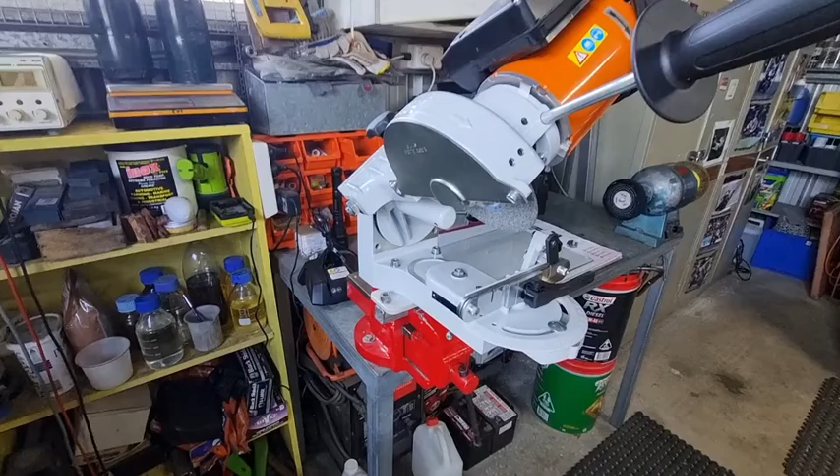Somebody was asking me if I could talk about the USG angles and cutting angles, and explain those on RS chain and RM chain. RS chain is your full chisel, and RM is your semi chisel.

I'll just put this up on screen now. This is an old box you're watching at the moment, about 12 years old. I'll leave it on screen and you can do a screenshot or have a look at the different types of chains there.

So there's still all alphabet letters. There's also PMX, which is ripping chain. RSK, which is Rapid Super Classic, spelt with a K, not a C. PMN, Picco Mini. There's also Pico Mini Micro - I think it's Pico Micro Mini. Yeah, whichever way it is, that's what it is anyway.

RMX, which is ripping chain. RCX is a different type of ripping chain - maybe the difference is full skip or semi-skip. You've got RMH, Rapid Micro Harvester, used for harvesters. You've got Rapid Micro Harvester Special, so whatever that one is, that's something different.

PD and PD3 stands for Picco Duro Tungsten Carbide, so there's a difference between PD and PD3, not too sure on that. RH is for Rapid Hexa. RS, Rapid Super Full Chisel. RM, Rapid Micro Semi Chisel. There's also an RSC for Comfort. So yeah, there's actually quite a few.

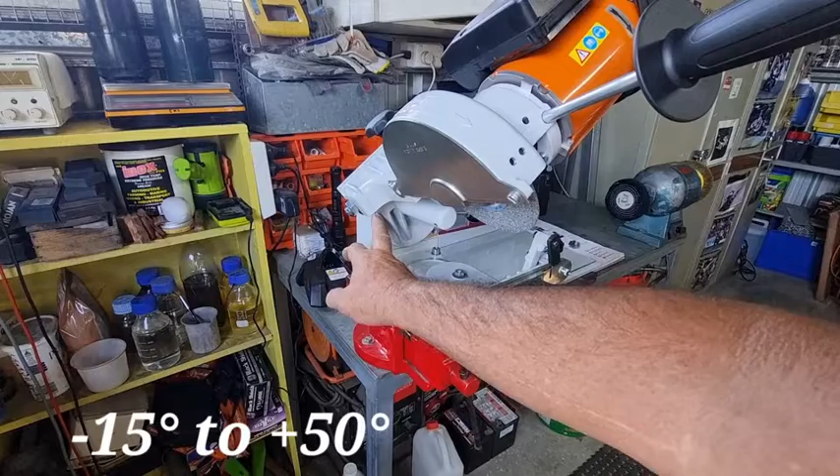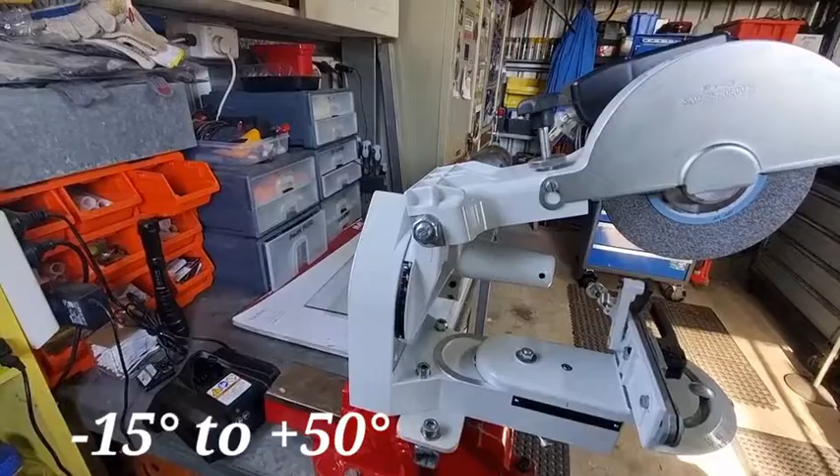This is all your degrees from minus 15 degrees right all the way up to 50. It's just a matter of moving this lever and you can rotate like that and see the degrees. If we zoom in, you should be able to see them all there. So there's your 50 degrees, and right down the bottom is your minus 15 degrees. So you've got a fairly large scale there.

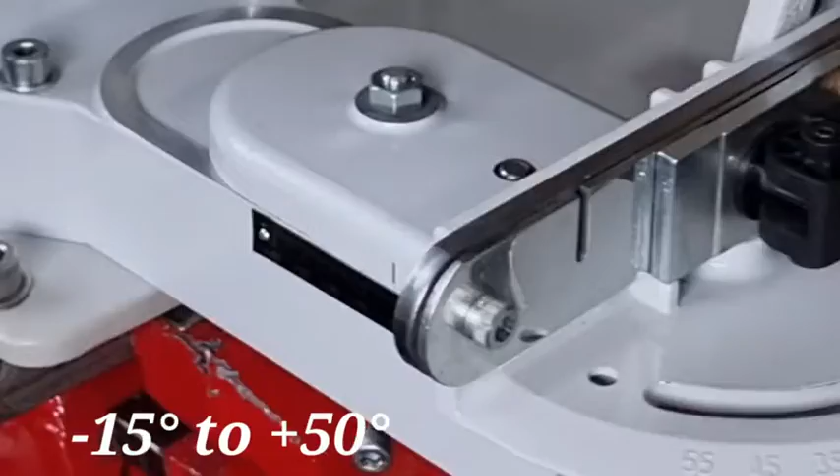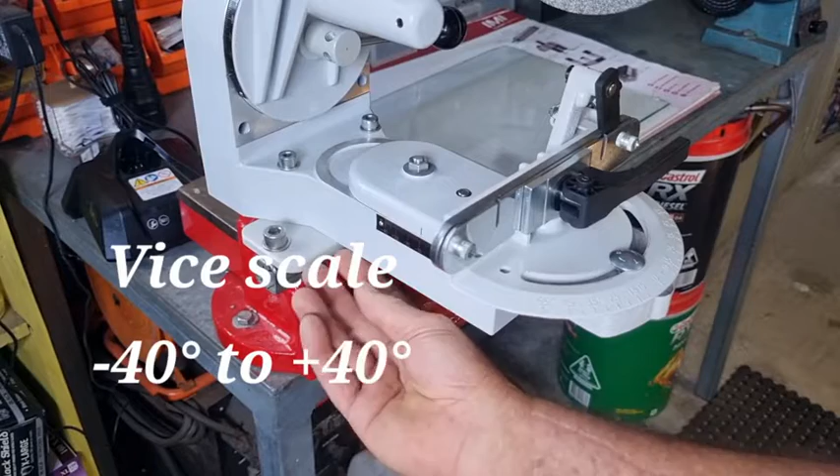The next is the movable vise. So the vise slides backwards and forwards, also used to centralize the wheel, also used for the other attachments for the hedge trimmers, and also used for the circular saw blades that can be sharpened on here as well.

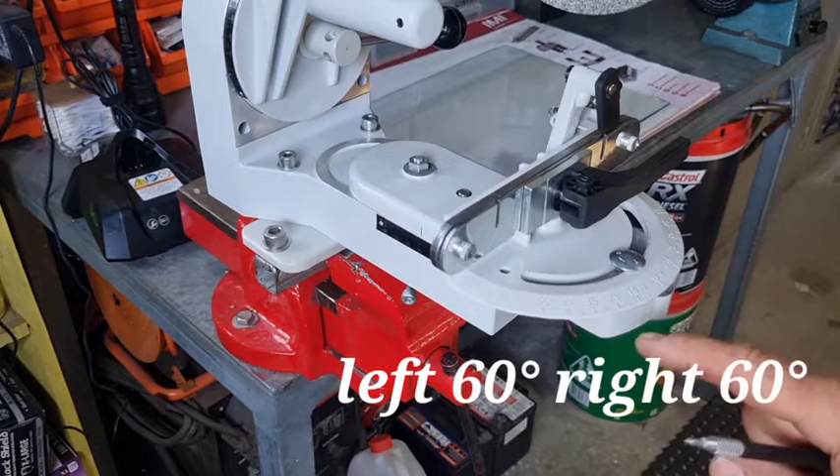The next is your C scale. This is your top plate angle, the top of the tooth. It goes up to 60 degrees left, and up to 60 degrees right. But on a chainsaw, we only ever use 35 degrees left and 35 degrees right. So it's got that functionality, a large range of functionality on it.

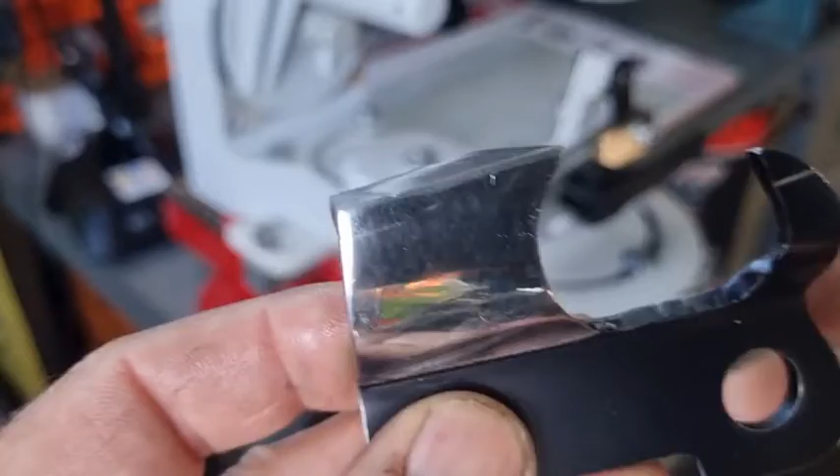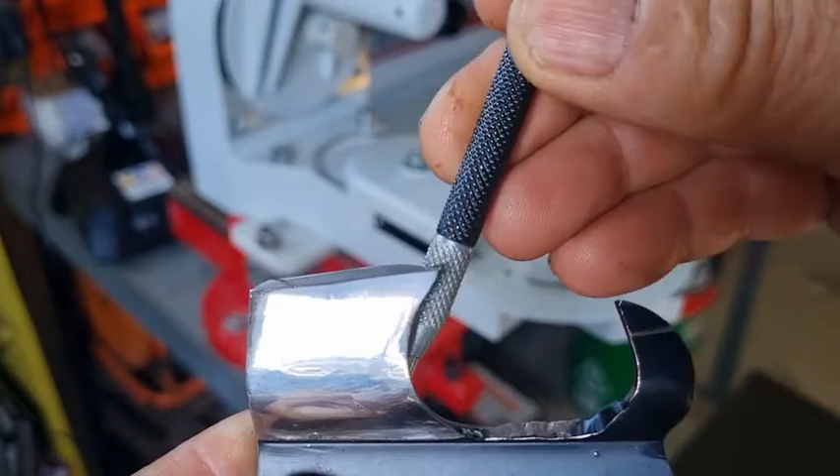So Stihl have a more aggressive top plate cutting angle. Now, for those not too familiar with top plate cutting angle, if that's a tooth, that's the top plate - when you look down, that's the top plate. But there's another beveled edge on there, and that angle is on an angle. That angle on an Oregon is 60 degrees generally, and that translates to 30 degrees on a Stihl grinder.

Stihl like to keep 40 degrees on their semi-chisel and their full chisel. Now, if you've got an Oregon grinder, 40 degrees translates to 50 degrees on an Oregon grinder. And 30 degrees on a Stihl translates to 60 degrees, and 25 degrees translates to 65 degrees.

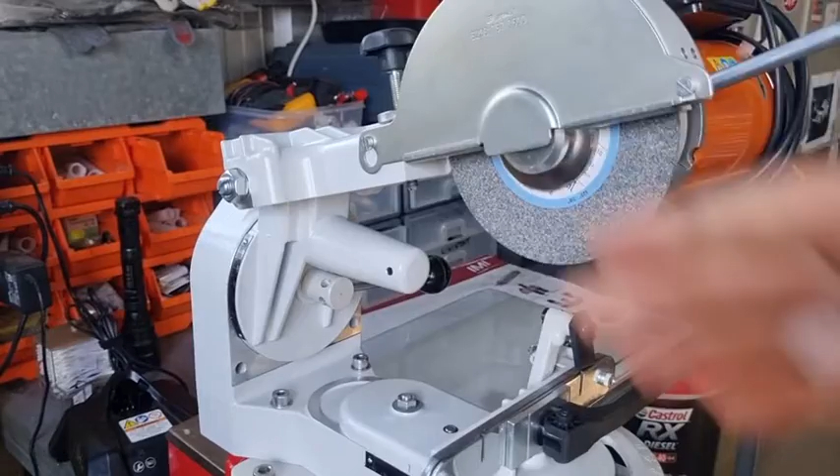So it's pretty easy to work out, because on a Stihl, when the grinder is sitting up vertical, it's on 0 degrees at the top and it tilts down that way, and at that position is 90 degrees. On an Oregon grinder, it's totally different - it starts at 90 degrees vertical and tilts the opposite way and goes to 0 on this side. So it's different, exactly the same angle, except a different reference point. That's all you have to understand - you've got a different reference point and you can work it out.

The C scale, which is this one here, is the same as the Oregon. No difference. So your semi-chisel and your full chisel, use 40 degrees on there. 40 degrees would be, we'll just tilt it to the 40 degree position. That'd be 40 degrees there. So that's 40 degrees on a Stihl USG grinder. That's what 40 degrees looks like.

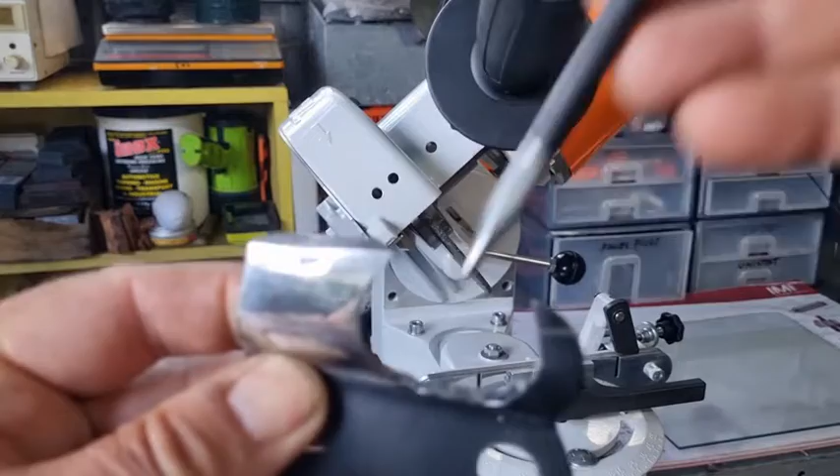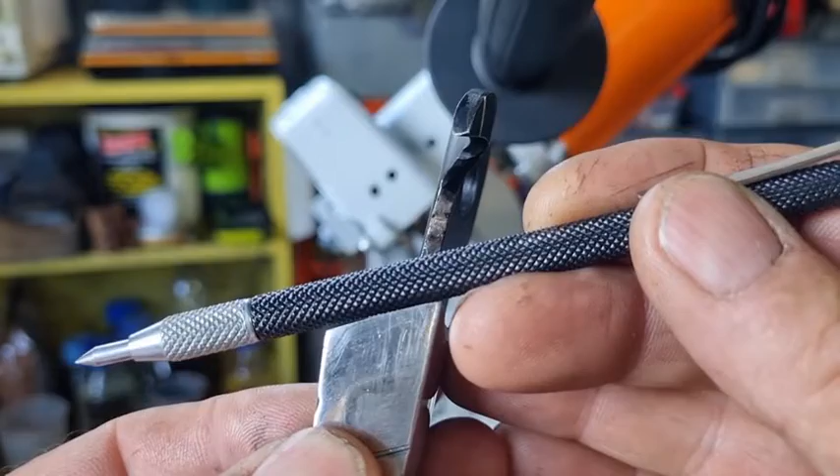50 degrees on an Oregon. Most of the time you'll read about chains being anywhere between 50 degrees and 60 degrees side plate cutting angle, I should say. Don't get it confused with the top plate angle. This angle here on full chisel is normally 25 degrees, and on semi-chisel it's 30 degrees.

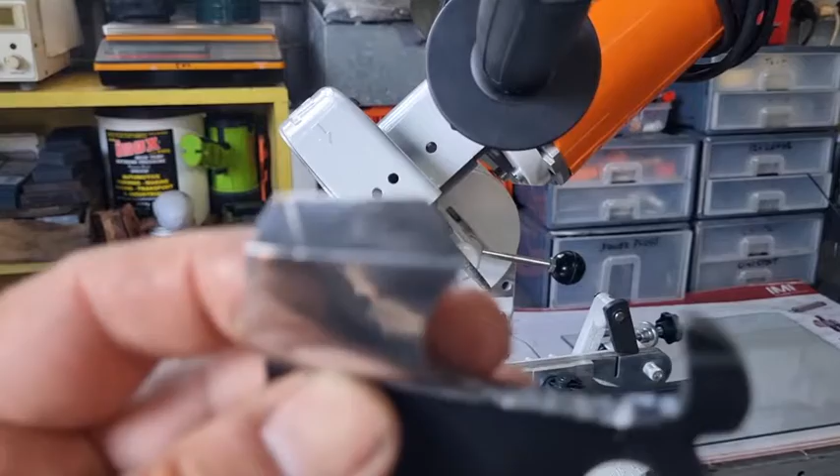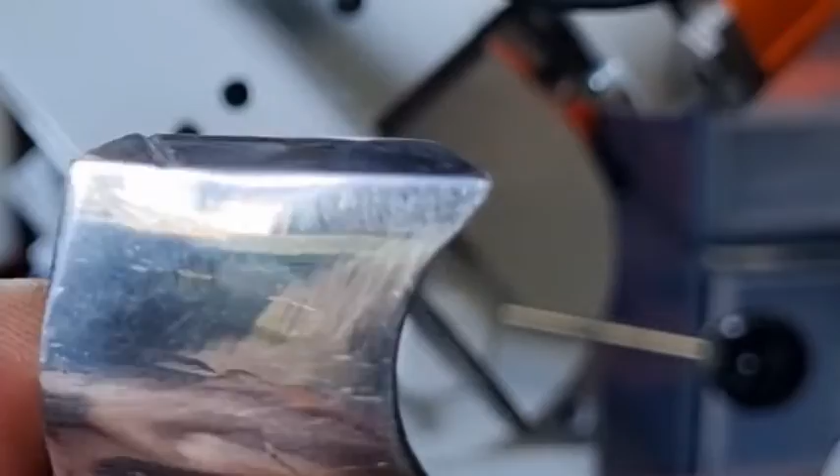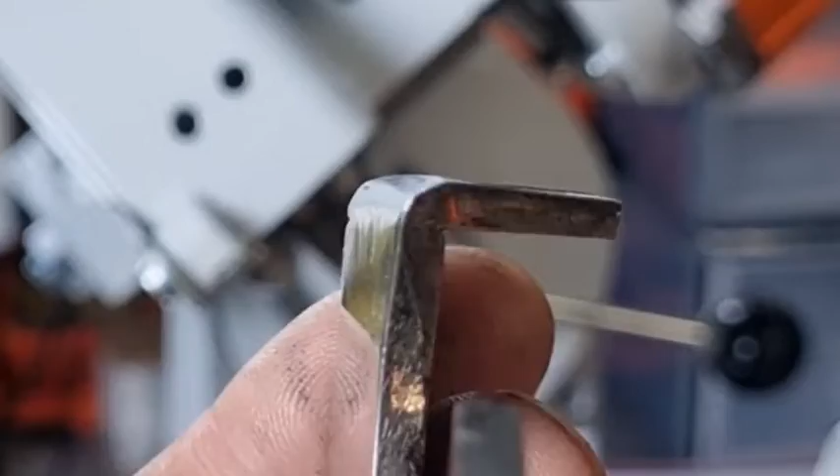Now, the difference is the full chisel is much more pointy and has a square shoulder on it, and this edge here is more prone to getting blunt much quicker. So that's the square shoulder, and you can see that. The semi-chisel has that rounded corner. You can see that. So this edge here has got a lot more room on it, so it takes a lot longer to become blunt. So that's the difference.

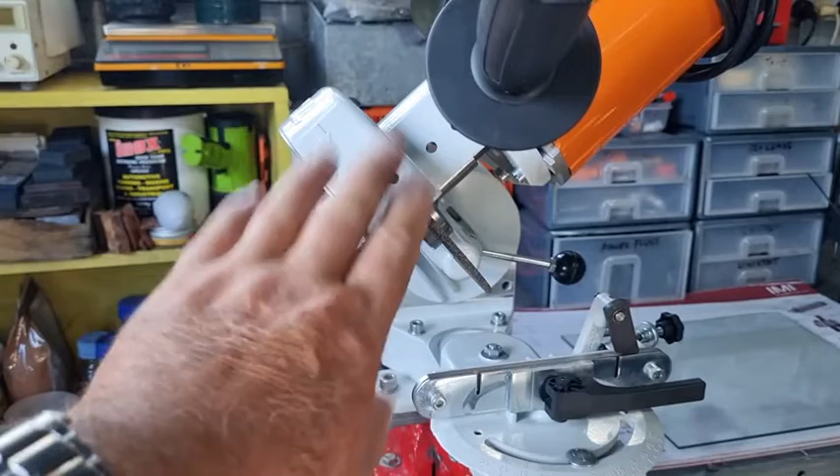Now, when you do look at all the angles that are on here, you'll find out that the A column will give you the angle of the head. All the chains, except for the milling chains and Rapid Hexa and tungsten carbide, forget those for the moment. The semi-chisel and the full chisel are all 40 degrees. Your Rapid Hexa runs 25 degrees. Your Rapid Duro on there at 10 degrees.

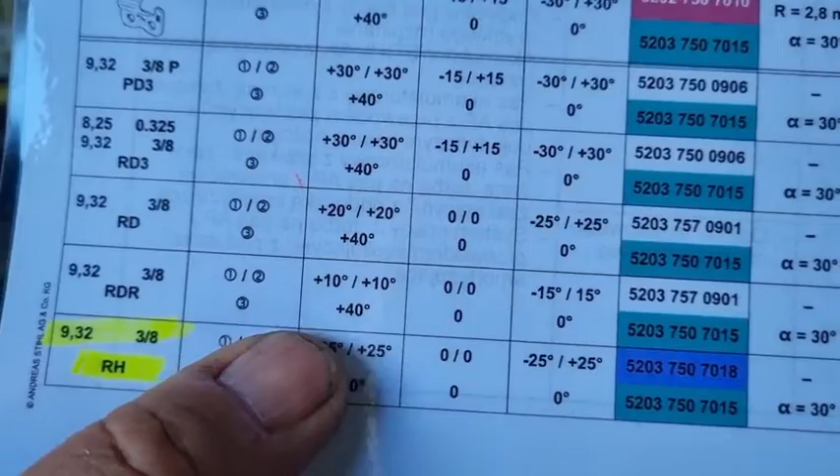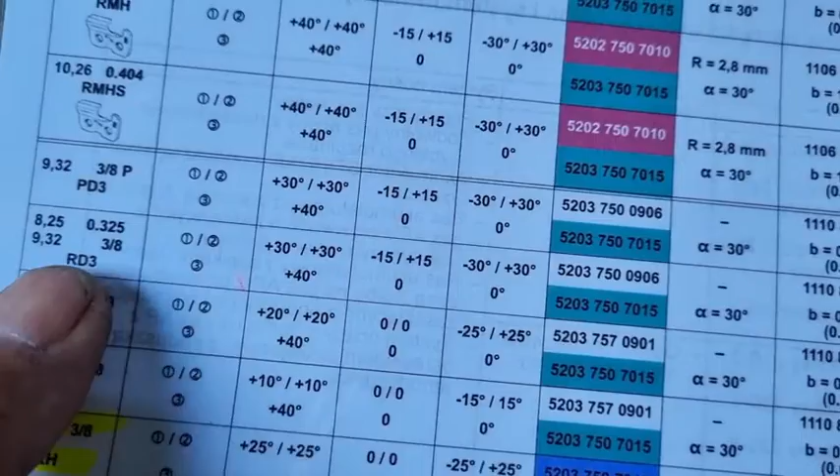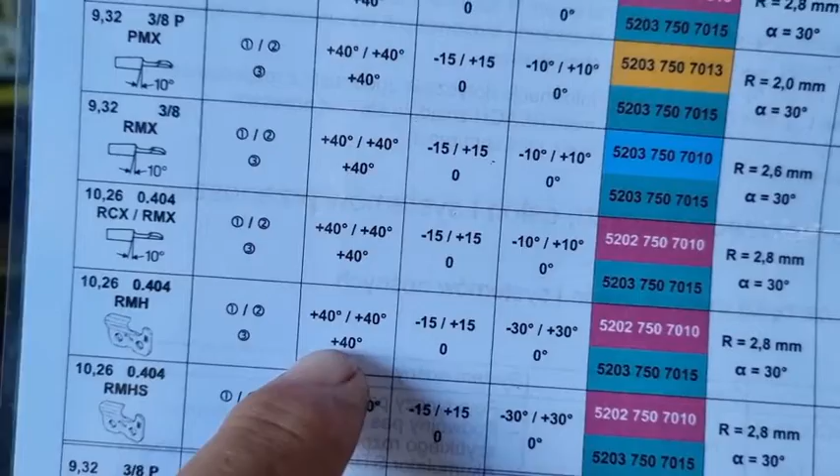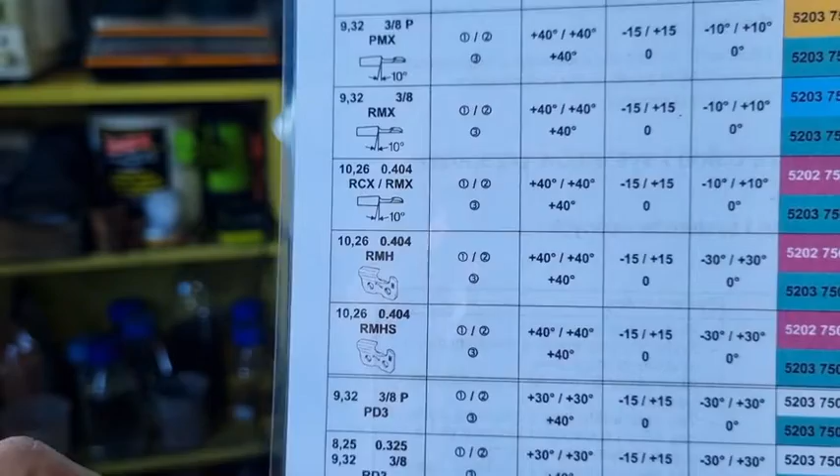Your Rapid, there's two types. That's rescue, I think that's a rescue chain actually. So the Rapid Duro runs 20 degrees, and the Rapid Duro 3 runs 30 degrees. Little bit difference there. And then you've got your milling chains, 10 degrees on that, and it's still 40 degrees on the top plate cutting angle coming in. So the only ones that really change from the 40 degrees are your Rapid Duros, your rescue chain and the Rapid Hexa. They're the only ones.

All your semi-chisels, skip tooth, they all run this 40 degree angle, which is a 50 degree on an Oregon. Oregon runs 60 degrees. What's the difference between 50 and 60? 50 degrees is more aggressive, simple as that. So you can run 50 degrees, the choice is yours. But I generally go with the recommendation of the manufacturer. So that is the recommendation, 40 degrees on here for your RS and RM chains.

Now, the other thing is, your RS chain is your full chisel chain, and the top plate on that is 25 degrees. So that's your top plate angle here, 25 degrees. So that's what you set it at, full chisel. 25 degrees will keep it a bit sharper, won't go as blunt as quick as 30 degrees. A lot of chains on full chisel run at 30 degrees. 25 degrees is a good compromise.

On your semi-chisel, the top plate runs 30 degrees. Because it's got this nice rounded corner at the front, the working corner, it tends not to go as blunt. It's a little bit more durable, lasts a bit longer. So the maintenance on the full chisel is a little bit more frequent sharpening, less sharpening on the semi-chisel. So that's pretty much it in a nutshell.

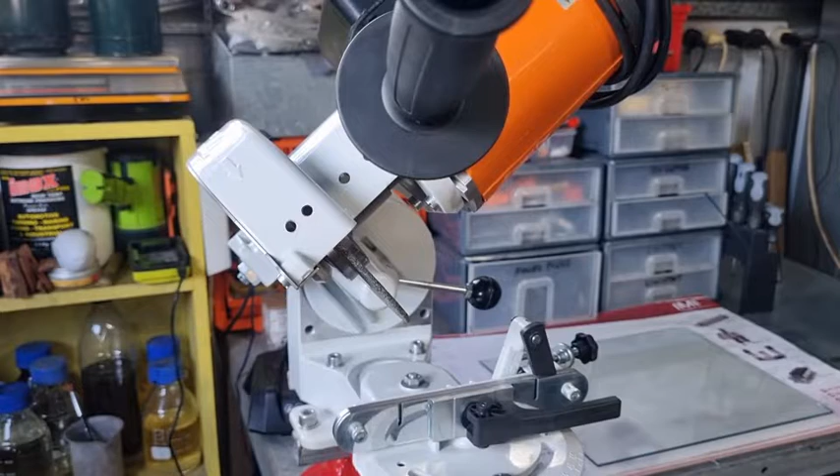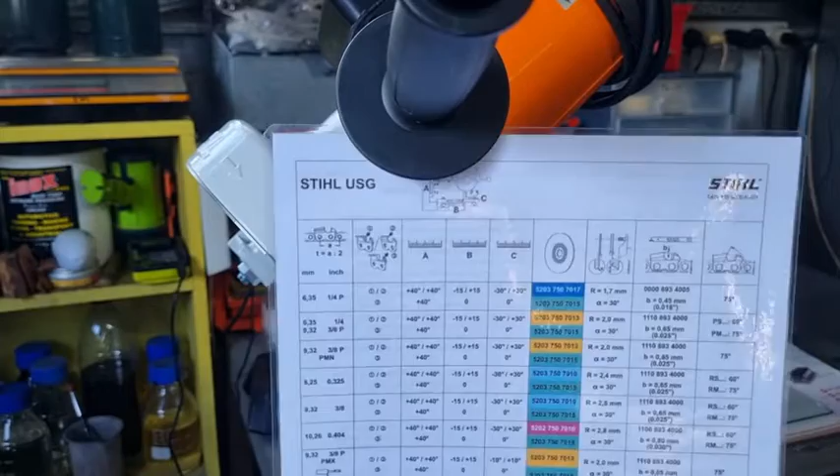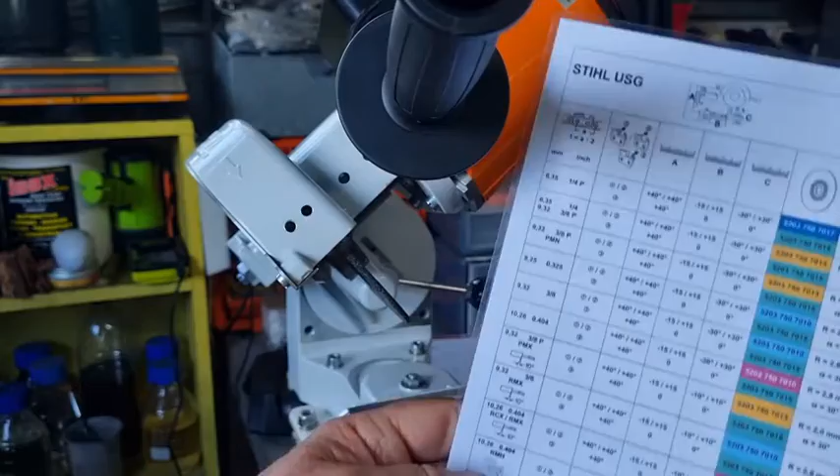So if you do buy a Stihl USG grinder, you can get on their website and do a search, and you can actually download this in PDF format. I actually got this from the Stihl dealer. I wished I would have got the actual file on USB stick, but he printed it out for me. So can't get it in colour off the website. I tried. It's only in black and white, but nonetheless, that's just an identical copy of the original A3 that it comes with. So that's pretty much it.

I don't think there's much else I could talk about, because I've gone over the different chains, and as I mentioned, some of the new ones that have come out are a little bit different. They're all using alphabet, and I can't remember every chain by alphabet, because they're all using RMX or RCX, RMH or PD this and RH that, and RM this, full chisel, semi-chisel, ripping chain. If the alphabet said FC for full chisel and semi-chisel was SC, that's pretty straightforward. And if they had ML for milling and SK for skip, that would be pretty easy to understand.

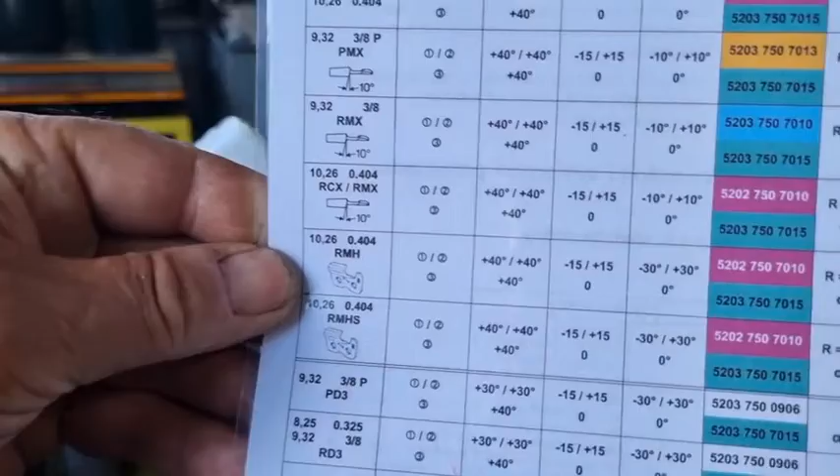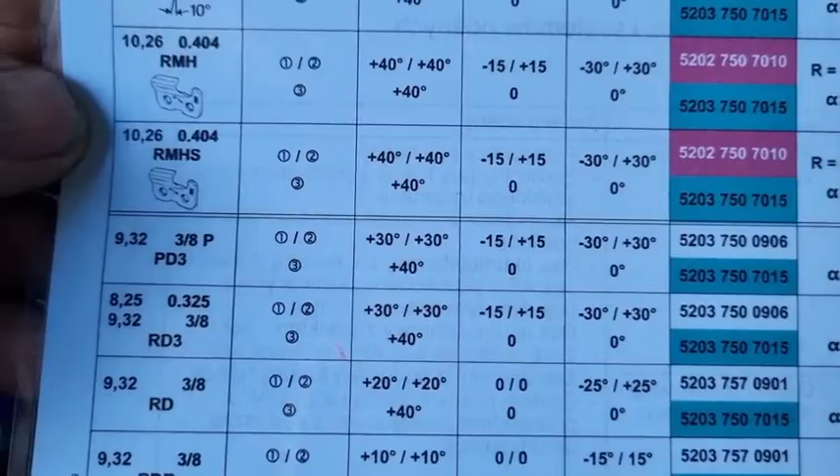But for the life of me, I can't remember all of those. PMX, RCX, RMX, RMH, RMHS, PD3, RD3, RD, RDR. How the hell am I going to know those? Because one of the demolition chains is diamond. So they could put DIA for diamond. Anyway, is what it is.

I've been buying Stihl chain for about 20 years, and I only ever use full chisel, semi-chisel, and skip chain in full chisel. And the only other chain that I use is tungsten carbide. So I do remember the four: RH for rapid hexa, RD for rapid duro, RM for rapid micro, and RS for rapid super. They're the only four that I remember. If I worked in a shop and I'm selling them day in, day out, I'd probably remember the whole bloody lot of them.

But yeah. So I hope that addresses some of the angles of the Stihl USG grinder. You can run those same angles on your Oregon. Just remember that 40 degrees on a Stihl USG grinder is 50 on an Oregon. The rest is exactly the same. The only difference on the Stihl is that you tilt it to the left, and on the Oregon it tilts to the right. Exactly the same process, and it's the same thing.

On the Stihl USG, you feed the chain in that way. So the front of the chain faces, this is the front here, this is the back. On an Oregon style, it's the other way. The chain comes in this way. It's just a little bit different. Once you've got both grinders and you've had them for quite a while, it's a bit like speaking a different language. It just automatically changes in your head. Like 90 degrees for an Oregon is 0 degrees on a Stihl. So it becomes second nature. It really does become easy.